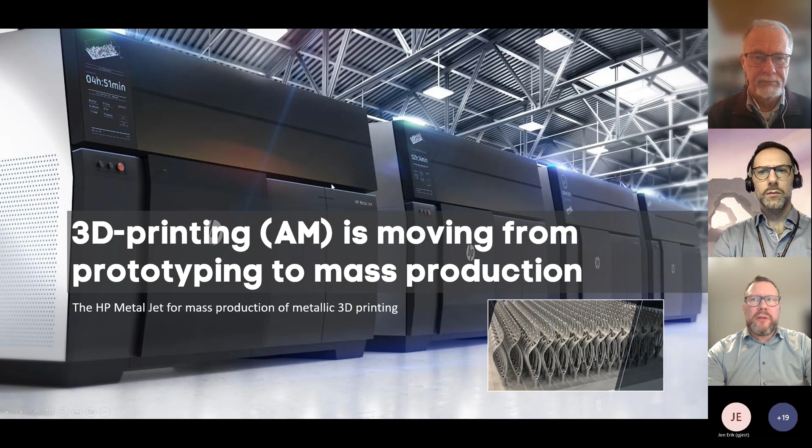As we saw in the previous presentation, you can locate the production in different positions in the system. So in SPARSAM, we're working with the idea of where you put the production and what consequences that has for the system.

Around that, we are using different types of scenarios. In the first scenario, you locate the production of AM in a central factory, which then, of course, means that you might need to ship it to a central distribution center.

In scenario 2, you could also position the production at a central distribution center, or you can push it even further out to a regional distribution center, or, as was discussed in the previous presentation, you could push it very close to the point of use or point of consumption.

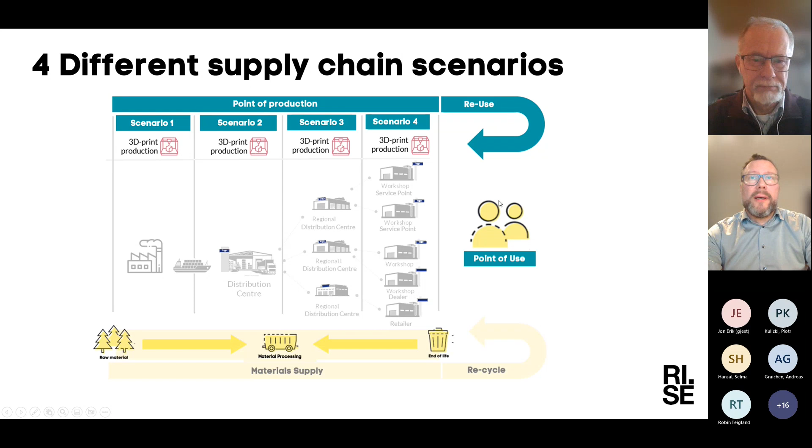As was also mentioned in the previous presentation, you can reuse materials, or use virgin materials, or work with remanufacturing. So the questions we are trying to look at in this activity are: which parts should be 3D printed, and where should they preferably be printed in this system?

Usually when parts are being selected for AM, traditionally technical selection criteria have been used—for example, complexity of shape, material cost, that low weight is essential, potential to consolidate parts, or small series.

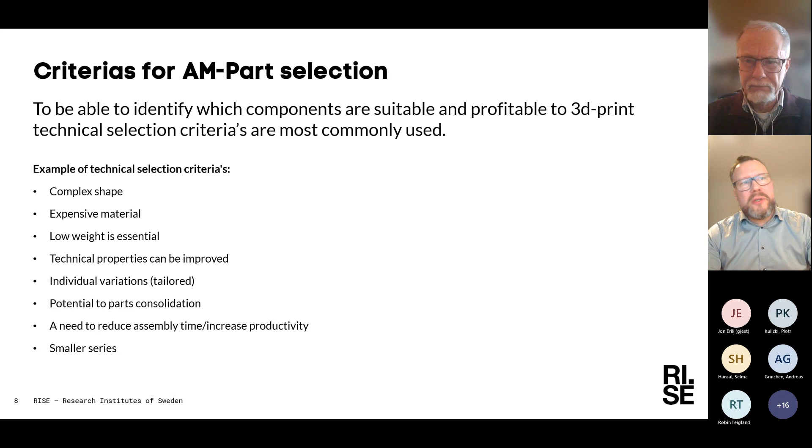But if you broaden the scope and look at it not only from a technical perspective, but include other aspects into the equation, the end result might look different.

One example: what happens if you add the business perspective when selecting a part is that usually, when you calculate the cost on a part, you also calculate on a volume. Let's assume you are calculating on a volume that is 10 times bigger than you actually need. Then, compared to an AM part, it could become 10 times more expensive than a conventionally produced part.

So in many cases, the volume that is being produced is bigger than what is being used, which means you need to put it into warehouses. And when you put it into warehouses, you also need to pay the cost for transporting these goods, and then also to carry the inventory.

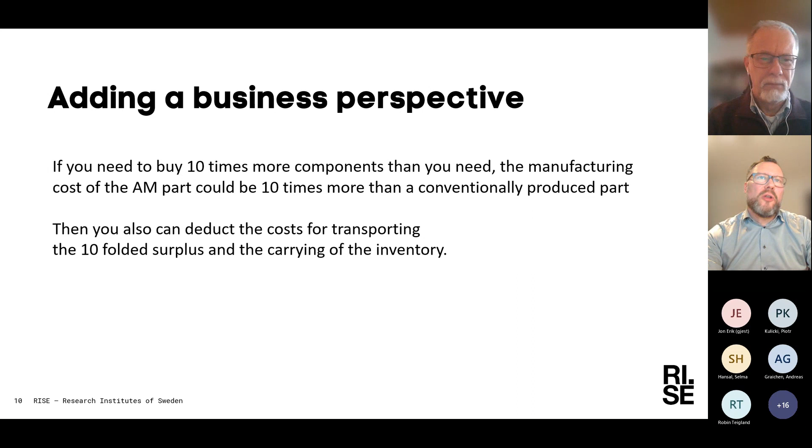So the point here with the SPARSAM project is to broaden the perspective when you're making this calculation on what is worth 3D printing. And then, of course, we are going to keep the technical selection criteria.

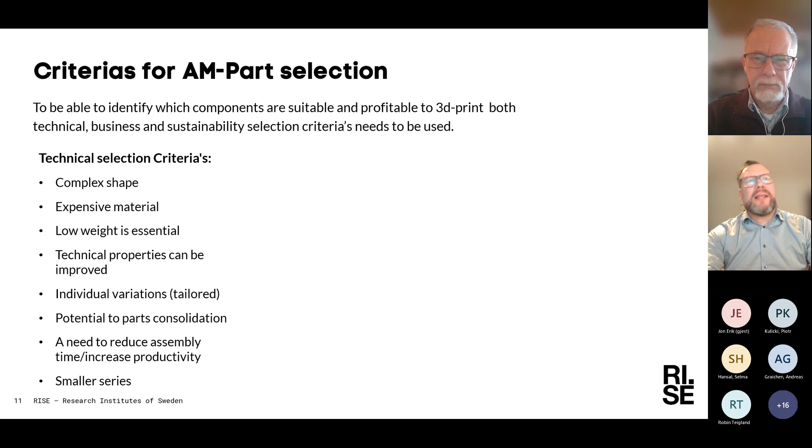But then the idea is that we extend it with business selection criteria, like what kind of reductions can you make in warehouse cost or inventory cost, or what if you increase parts availability or calculate lead time, or the numbers for reduced transportation. From a customer perspective, it might be that you get better uptime. And then also, as we saw in the previous presentation, you can add a sustainability or planet perspective, calculating CO2 emissions or reductions in material consumption and energy usage.

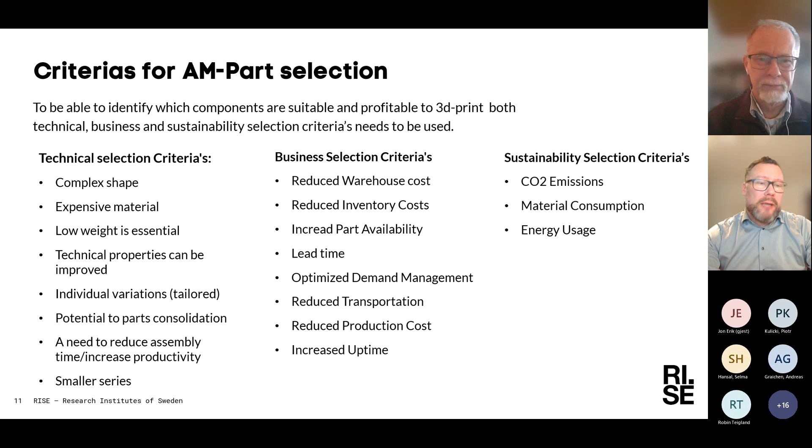Magnus, is there something you would like to add to this picture we're painting up here? No, I think that covers what we have gathered so far. So please, back to you, Markus.

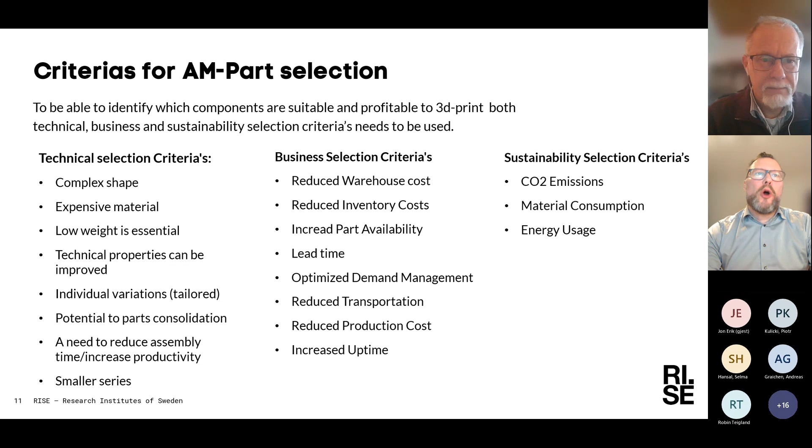So the idea then is to work with more selection criteria in order to take a broader perspective. So looking at this, this is a feasibility study.

We started off in October last year, and we have been working for 2 months. The activity is divided into 4 different work packages, where we have completed the first 2. One of the first packages is, of course, to establish the team, but then we have been looking into the current situation, what knowledge is out there, and what the main interests are among our industrial partners.

Right now, we are shifting focus to supply chain models and to identify the parameters related to this topic. And then in the 4th work package, we are looking for cases where we can drive the development of both the model, but also start to quantify these different parameters and aspects. And this connects back to the previous presentation.

Here we have a quite clear connection where the first presentation is a clear case. But then what we would be able to add into such an activity would be a structure and then ways to quantify it.

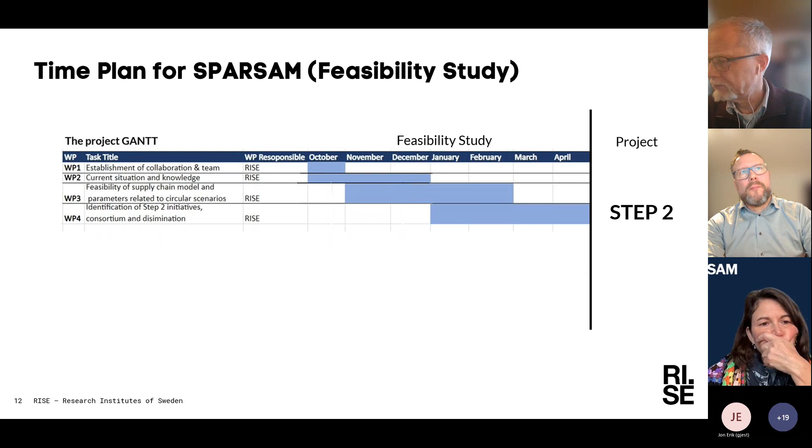Looking at the team, as I was mentioning, we're dividing it into 4 different work packages, and we have different competence and resources from our industrial partners covering circular business models and supply chains, and additive manufacturing.

And we also have, since we're talking about sustainability, it's not only about the planet part, but also the people part. And here we have an expert looking into gender equality and so on.

So far in this project, as I was mentioning in work package 2, we have been looking into the current situation, both in the literature and among our industrial partners. To give you a brief summary, we're going to show a couple of slides on what is in the literature here. It's quite interesting to see how the literature reflects the mindset evolution over time.

Looking about 10-15 years back in time, here you see the scope of the thinking. At that time, it was very focused on the factory, and the methods and main thinking were comparing conventional manufacturing with additive manufacturing, where additive manufacturing was seen as just another conventional manufacturing technique.

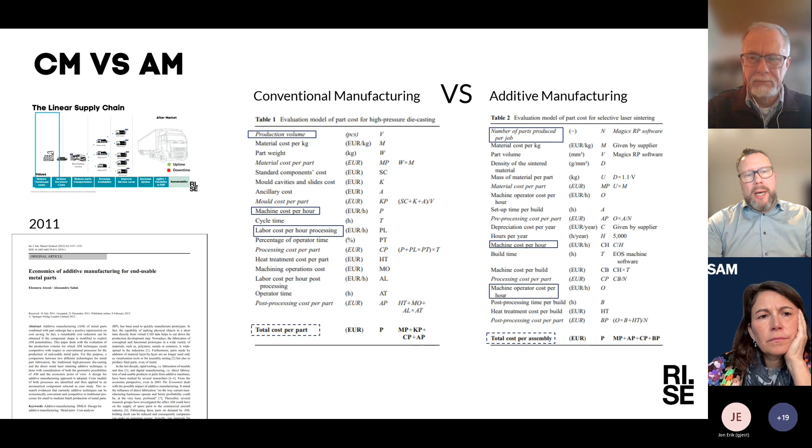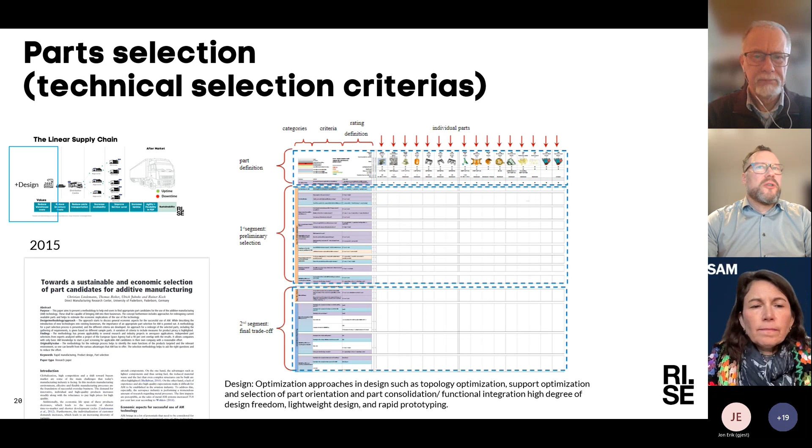Moving a bit forward in time, around 2015, the thinking has expanded. When it comes to part selection, a number of technical selection criteria had started to rise. Also, design thinking has started to take a bigger role, meaning that if you can start to calculate part consolidation or a reduction in materials, you get a different equation.

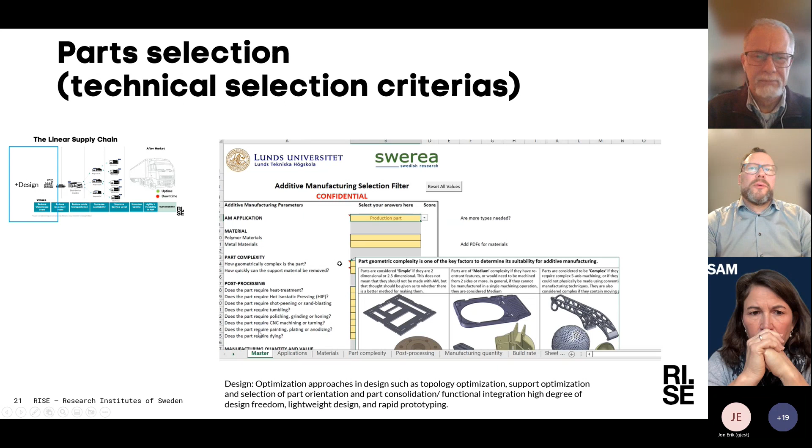Visiting our industrial partners, Volvo Cars, Volvo Trucks, and Alfa Laval, all of them had been part of previous activities with this mindset. Here you can see an example from an Excel sheet where material cost, part complexity, and post-processing were included in the equation.

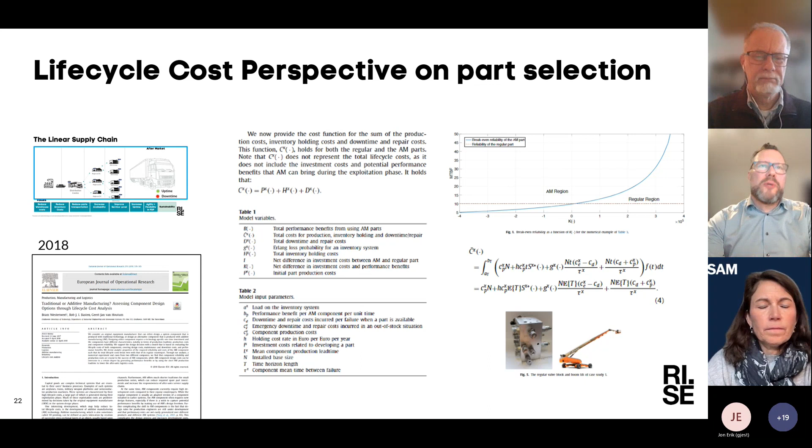Coming then to practical use, one work that we have found very interesting is a work that has been done within Volvo Trucks. They did a degree project together with Chalmers. What they did was call it the supply chain cost analysis, and then they were looking at additive manufacturing of slow-moving parts.

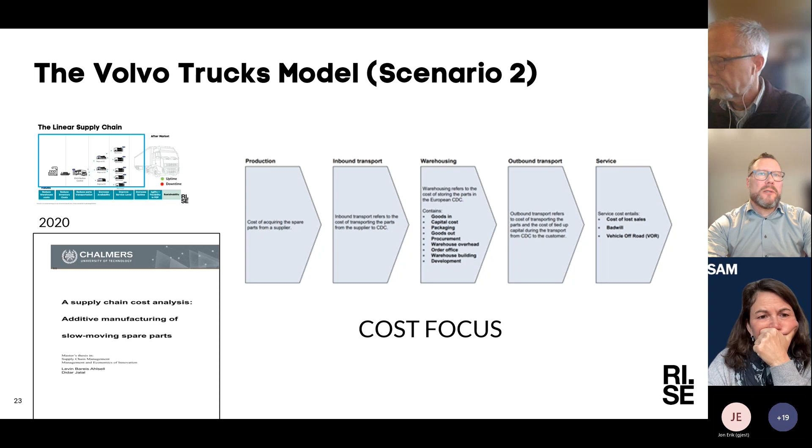But then also they were interested in adding the sustainability dimension into this. So this is the background, and then the challenge for the SPARSAM project is that we are looking at a selection model that has become very, very broad. Now I'm showing you very much work in progress, so it's very sketchy, but it indicates our thinking and where we are right now.

So here in the center, you see the cost-focused model that we have been picking up from Volvo Trucks. But in dialogue with Volvo Cars, we have seen that we need to extend it to also include the R&D dimensions. We also need to extend it into the use phase and to the end of life in order to be able to capture the sustainability aspects.

And if we're talking about sustainability, then of course the material dimension becomes really, really crucial. Are we using recycled materials or are we using virgin materials? And then of course you can also start to think about, okay, perhaps we also can start to talk about remanufacturing.

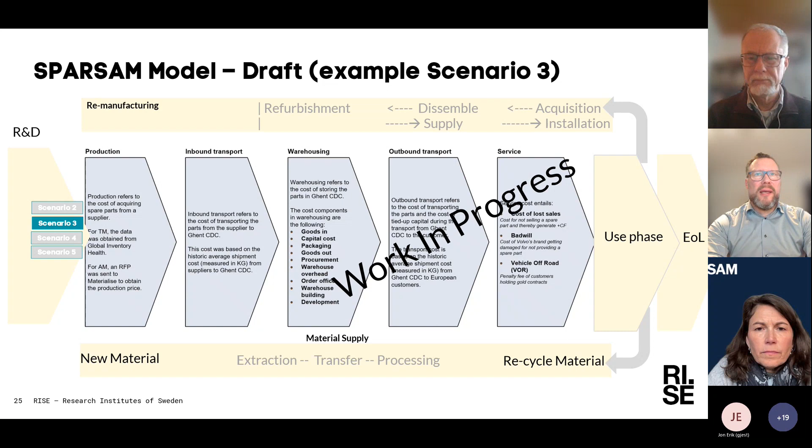So here we have a model and a way of thinking. And out of that, we've started to boil it down, looking at it from an activity perspective, from the life cycle perspective. We have the design phase and all the different phases in the life cycle, which you can break down into different types of activities.

These activities are influenced by which scenario you are using. If we have scenario 5, very close to the customer, you can decrease the number of transports. If you add or remove activities in the life cycle, that has an implication, an argument that could be expressed in time saved, costs saved, or sustainability savings.

Talking about sustainability, you can look, as we saw earlier today, at CO2 equivalents. You can see reductions or increases in material consumption, but also in energy usage.

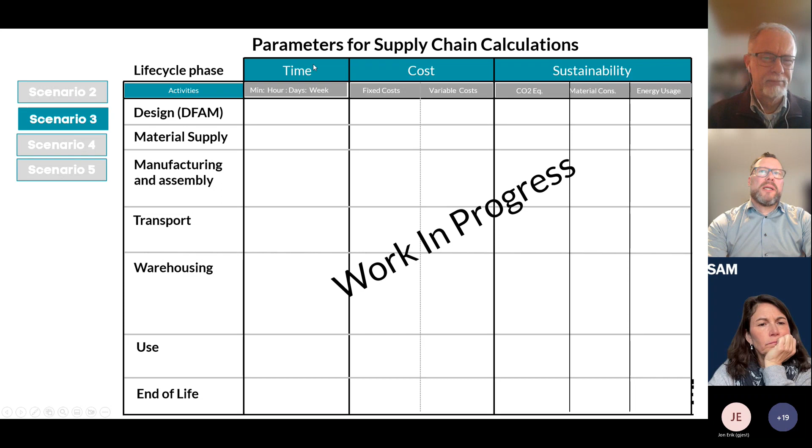With this model, we see that on a high level, but also by adding more detailed activities, we can have different resolutions. The resolution here is extremely low, but if you started to describe a supply chain based on one of these scenarios, you could also describe it in time, cost, and sustainability dimensions.

So what we aim to look at in step 2 is to identify a current supply chain. Most likely it will be a conventional supply chain with virgin material supply into tiers, into a factory, with a boat taking 22 days on the sea, with a regional distribution center, and then measure how much time that takes today.

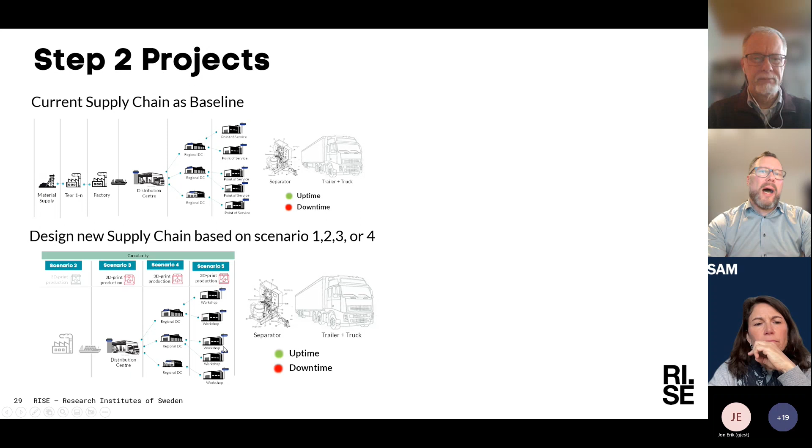And then compare it with one of these different scenarios. It could be a factory scenario, it could be the central distribution scenario, or it could be pushed very far out, close to the customer.

With this model, you need to detail and define the supply chain or these different activities, and then compare. So if this is the traditional way of doing it, and now we've designed the supply chain like this, what savings or gains are we getting from a time, cost, or sustainability perspective?

Out of that we get different types of values. As you can see, this thinking can be applied to many different cases. So in step 2, we are looking for different cases to apply this framework, to challenge the model, to verify it, and to develop it further.

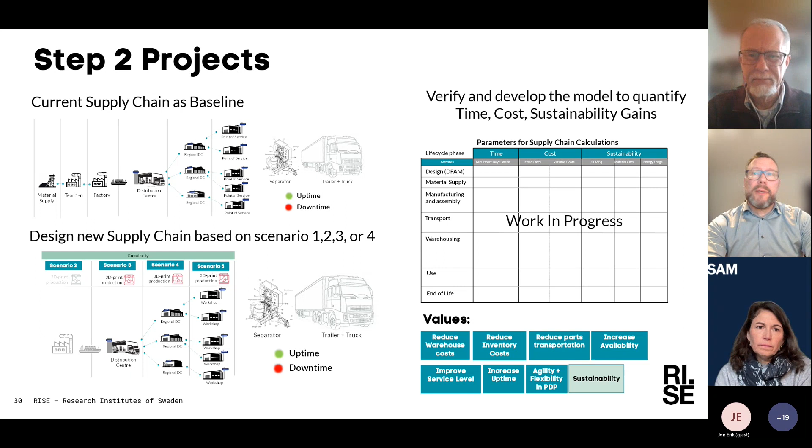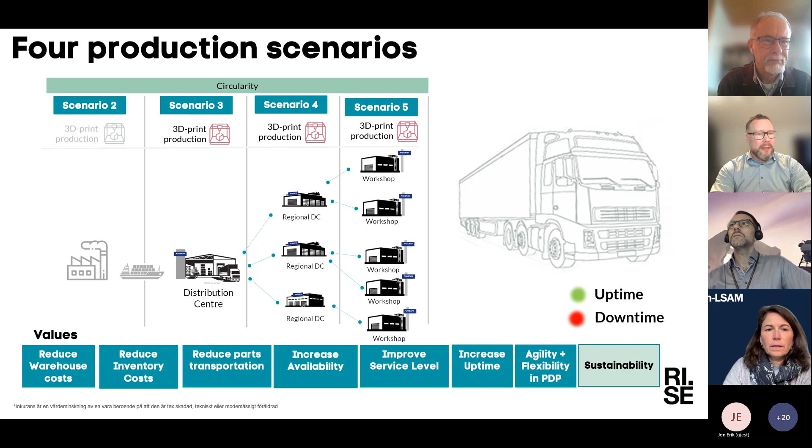So I guess that was the presentation of SPARSAM and the thinking, and what we are looking for in step 2.

Yes, and Markus, we can maybe add that from the visits to the companies, the partners in the project, Volvo Cars, AB Volvo Group, and Alfa Laval, we can see how seriously the partners are working with this selection process, and how far they've come, not only in thinking but in actually doing these processes.

But we also see the tricky thing of selecting components. And we see that what we are aiming for in this project, sustainability parameters, need to be added. We see one of the partners has added a kind of relationship between saved CO2 and an amount of money in the process.

This is going on within the companies because the corporate goals from the board and from the direction is to be really CO2 neutral. So this is an important part of the development process going forward.

And we are searching for a research project, and in the research agenda, we can see that there will come interesting tools, virtual tools for designing for AM to reduce support structures. That will also mean you can improve the circularity percentage of powder and reduce post-treatment and waste, and control the 3D printers in a better way.